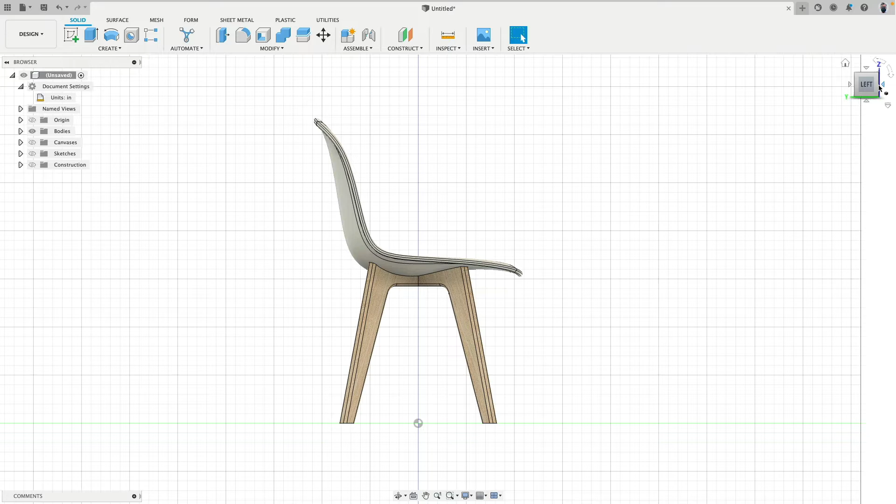Hello everybody, and welcome to this not too long tutorial in which I show you how we can sculpt the T-spline body for this plastic shell, then use some interesting sketching techniques to create a perfect sketch to position these wooden legs right under the shell, and then use solid modeling tools to trim everything so we have a perfect match. We'll also start by bringing in some sketches from dimensions.com, and with all that said, let's do it.

We can start this exercise by going to dimensions.com and taking a screenshot from the side, front and back of this Eames chair. While we will not necessarily rebuild this chair, it's actually a really nice design to use as a proportional guide, like for the backrest, the legs, the base, etc. So based on your operating system, Mac or Windows, use the correct tool to make side, front and back screenshots. Let's go to Fusion.

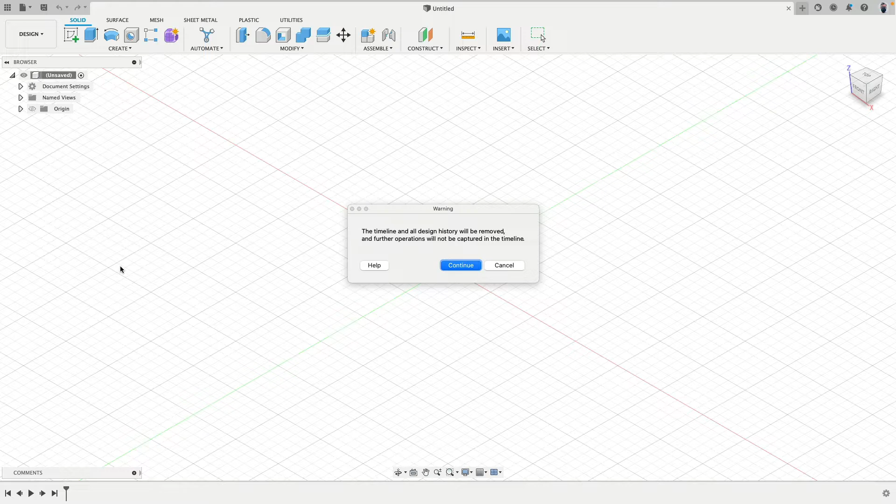First thing, we go to the root, right click, and turn off the design history. Then we go to document settings and set this to inches. Cool.

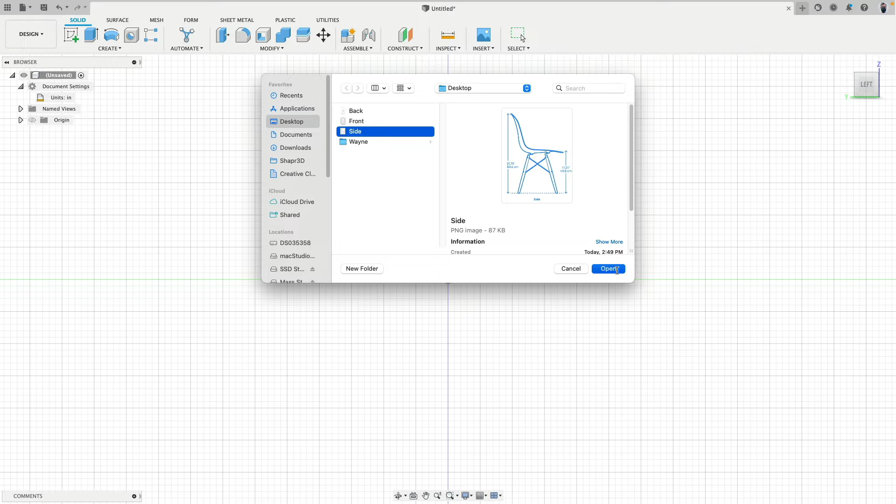We can now go to the left view, and then insert, insert from the computer, and here is my side image. I start with this one first because this one does actually have a scale. You can see this.

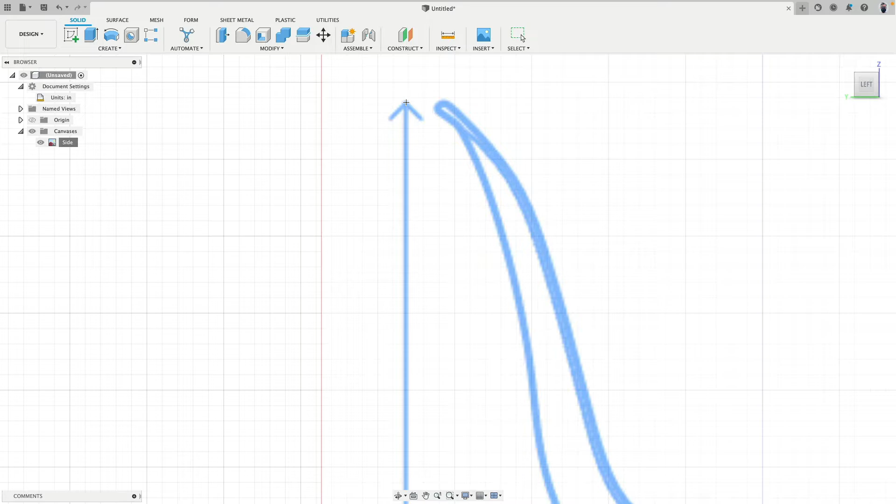After we clicked OK, right click onto the image icon for the side canvas, calibrate, and then I can select this and click there, and this should be 31.75 inches. I can zoom out a little bit, right click, move and copy. I will move this to here so that the top of the tip is on the blue axis, and then move this one up. Now I have this point right over the zero point along the z-axis. This makes the next step quite easy.

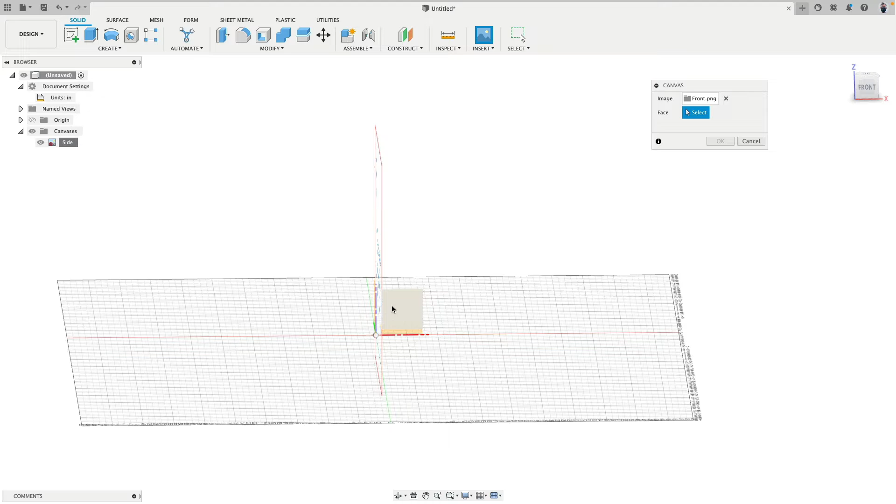I can go insert, then select the front image, and there we are, this will be on this plane. I can scale this up a little bit, flip this, move this up. Now we see this is way too small, so we can adjust the scale a little bit.

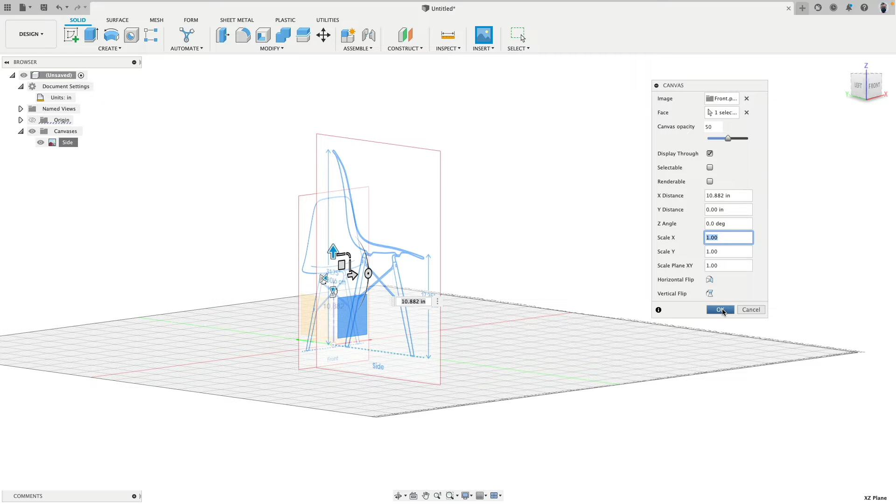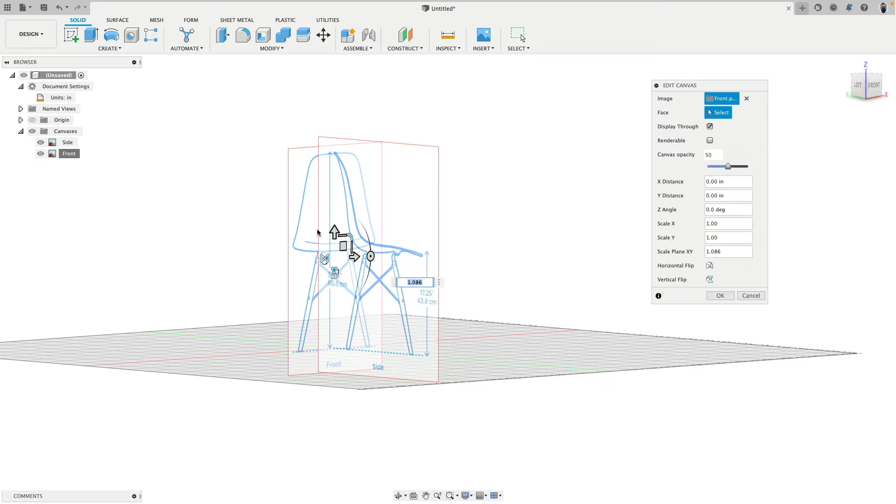I find it easier now to select the front image, right click, edit canvas. With this, I can visually move this up and down and scale at the same time. That nearly is it, maybe a little bit like this, okay, now a tick higher. So this is now on the x-axis and it nearly touches it. Yeah, this is actually pretty good.

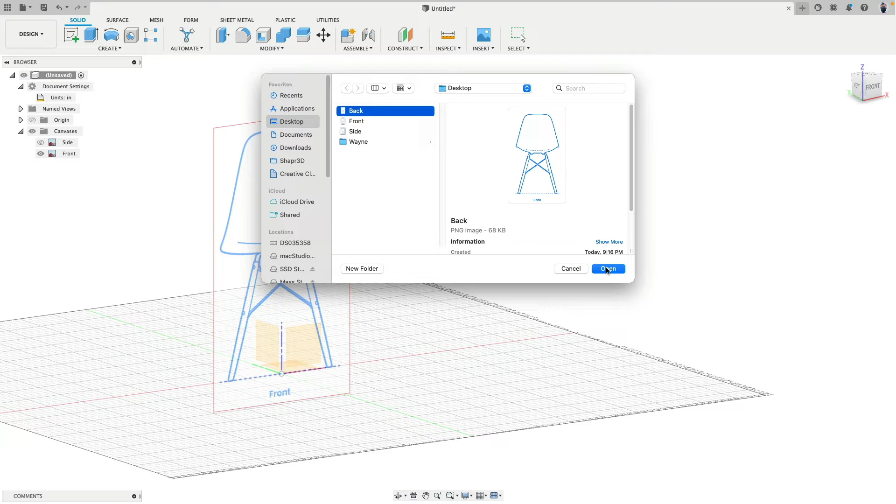I will now add the back image. There we are on this plane, and I can scale this one up. Now in this mode, I bring this one up and just try to match this as close as possible. Yeah, this looks pretty good.

Also, let's make sure this is symmetrical, so this is centered. This was the back. Right click, edit canvas. There, this is centered. Very good.

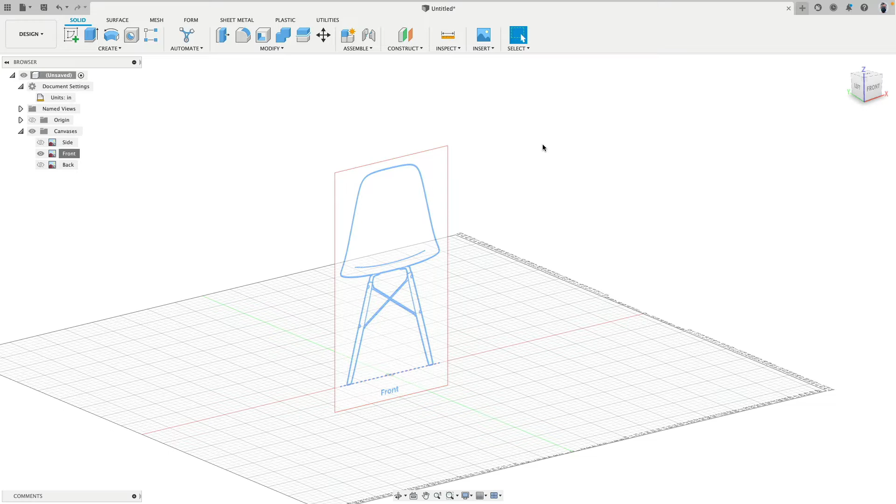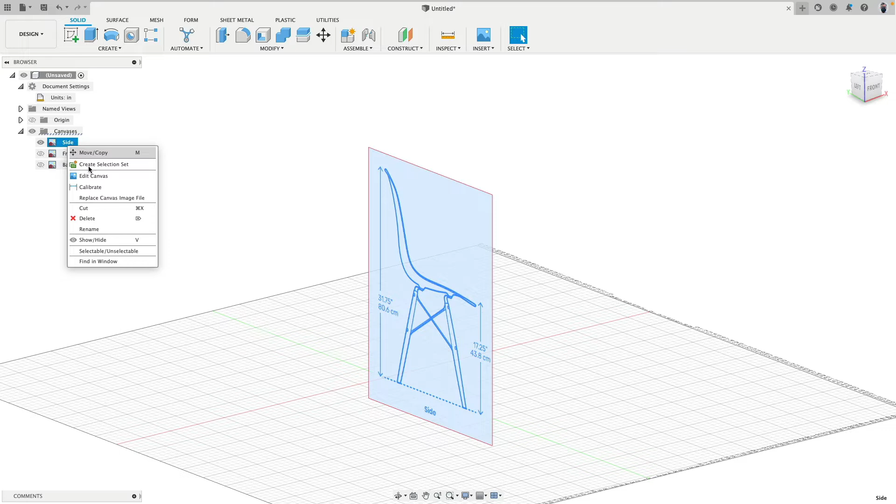In front view, I see the front image, so I'll move this one a little bit back. Then in back view, I will see the back image, so I'll move this one a little bit forward because I'll be looking from there. Then the side image, right click. What happened? There, right click, there it is. I move this a little bit further away because I'm always looking from these three views. Very good, so now we have our two most important elements set up, front view and side view.

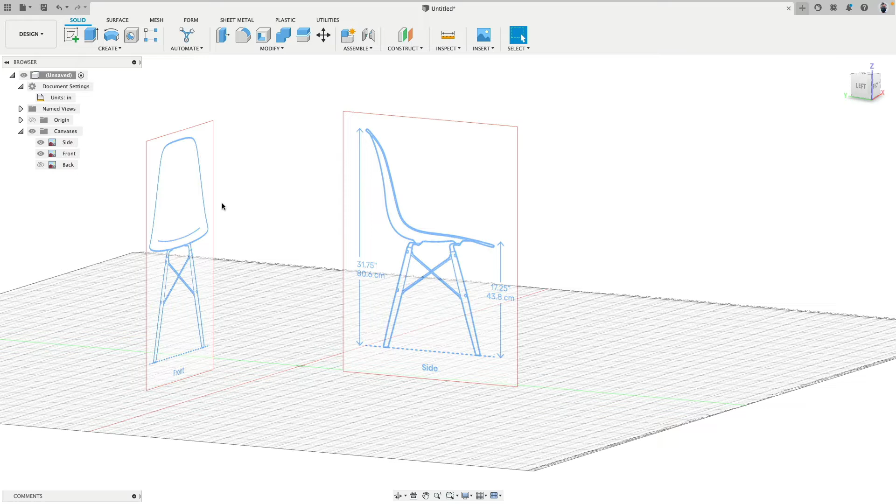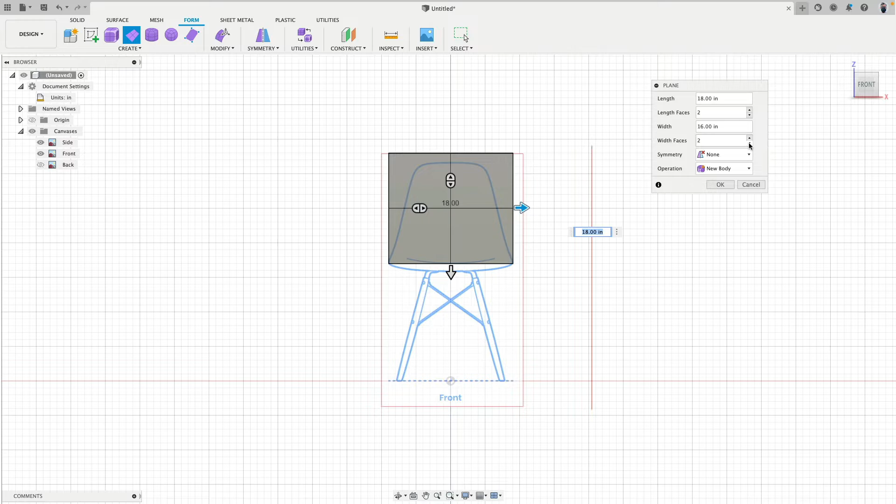To start now, we can go to front view, switch to form, and then go to plane. Click on this front plane, click somewhere here, and then I create a rectangle that is as wide as the image is. I set this to 1 and 1. Beautiful. Edit, modify, or here edit form, and then I select edge.

I can select this edge, go to the right view, move this one to there. Then I select the next edge, there, and move this one maybe to here. Now I need to have one point there. Now here comes the trick: hold the Alt and Option key, and then drag one more edge out to there, one more possibly to here, one more to there, one time more.

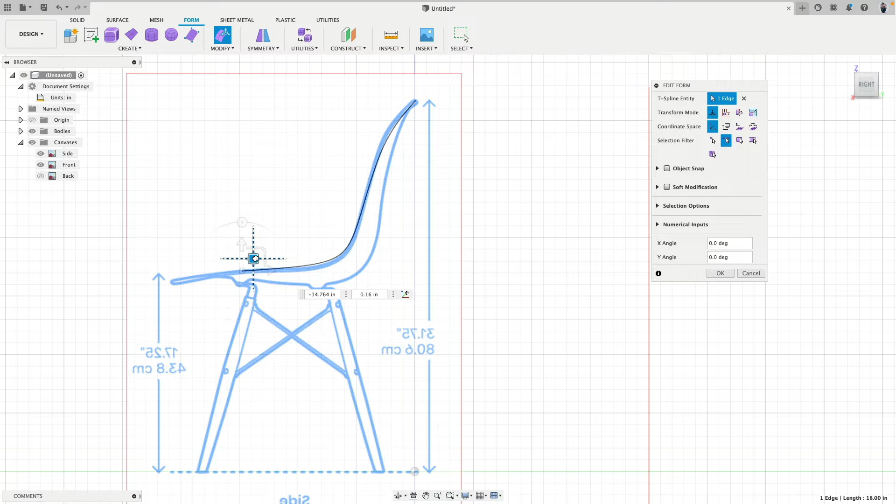I'm still holding the Alt and Option key and click and drag to there. So every time I hold the Alt and Option key, I click, drag and move, basically extruding out the piece. Okay, now it doesn't look too bad. Then we can go to vertex mode, drag over the individual points, and adjust how everything looks. And this feels pretty good. Okay.

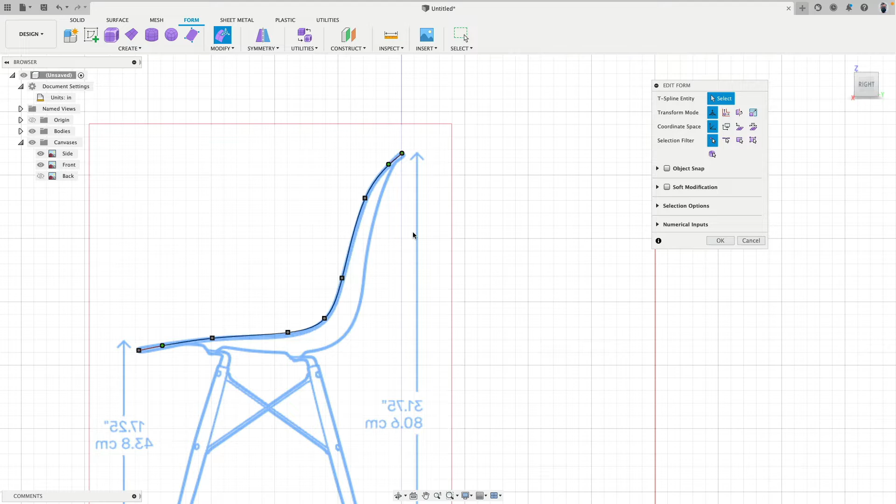Not bad. So now we need to do this center dip down. Go to the front view, click OK. We'll go to modify, insert edge, double click. That double click selects basically the whole edge loop, 50%, 0.5, OK. Double click and now I delete this one.

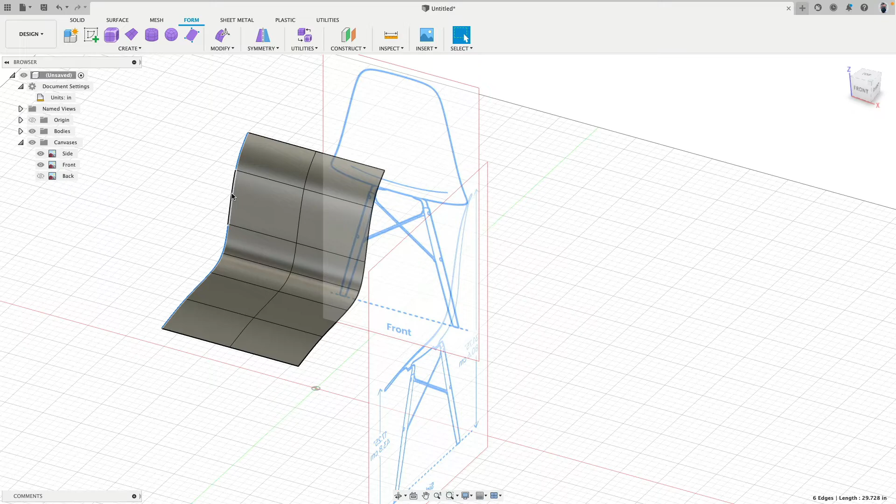So we removed the half. And I'm going to rebuild this back via symmetry, mirror, duplicate. So this one, mirror along this yellow plane, because that's the mirroring plane. Cool, okay.

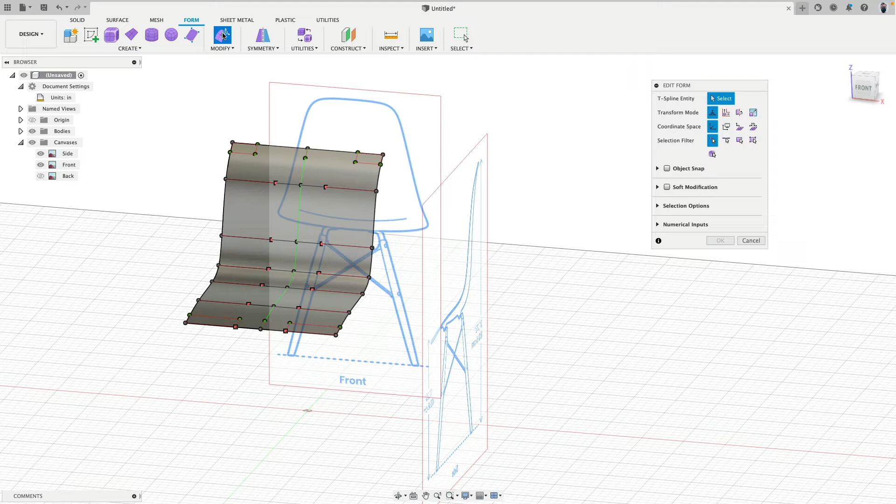Now I can go ahead and maybe select this edge, go to the side view. No, just pull this one out. Go to here, pull this one down. Go to the point, pull this one down. And play a little bit.

In a moment, we also have to adjust the handles. There we are, so this is kind of like cool. Click and drag over everything and then click on the chain, so the handles are all now aligned with the surface. That's pretty good, okay, that's nice.

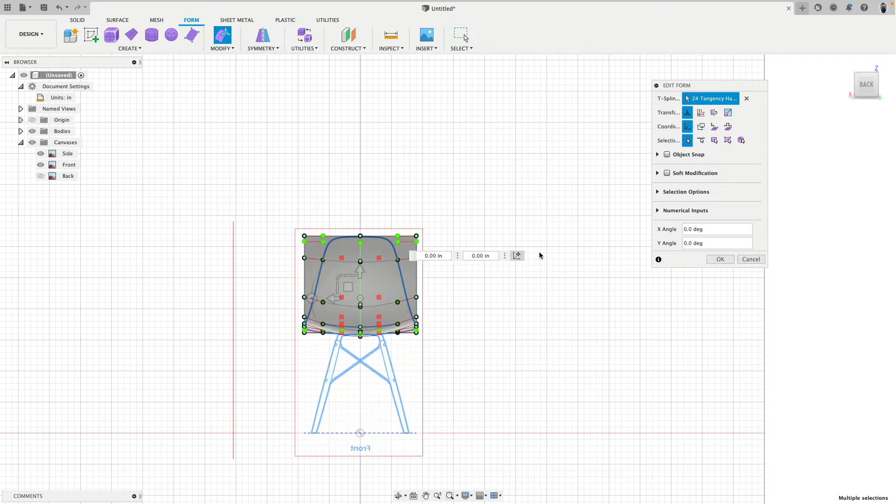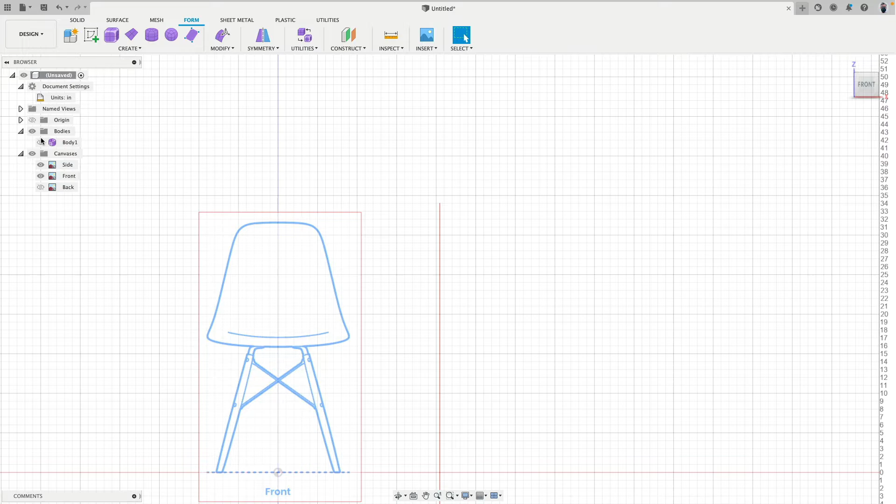So what else can we do? Now if we turn this one off, we can see how there's a little bit of an arc. And if I turn this one off and show the back, you can see from behind this dips down even more. Okay, so right now here, this is very linear. So this edge needs to dip down a little bit.

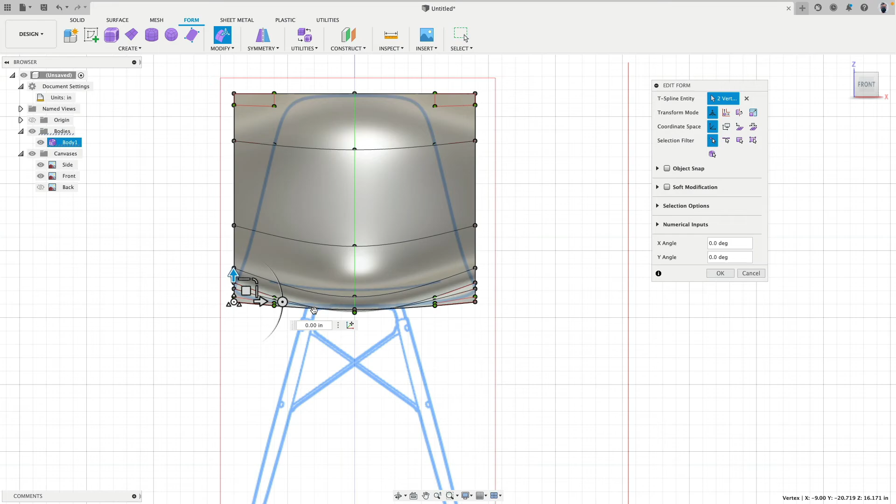Maybe like this. Yeah, maybe. Cool, okay, and the other points, for example here, they can go up a little bit. But before I do this, I will switch to edge select. Select this edge, this edge, this edge, and yeah, this is good.

And now I click on this set pivot point. Now you can see how I reset this position to there. Click and say OK, and I will rotate all these edges together at once. There you see this actually really helped moving this all in. All lines are moved smoothly together.

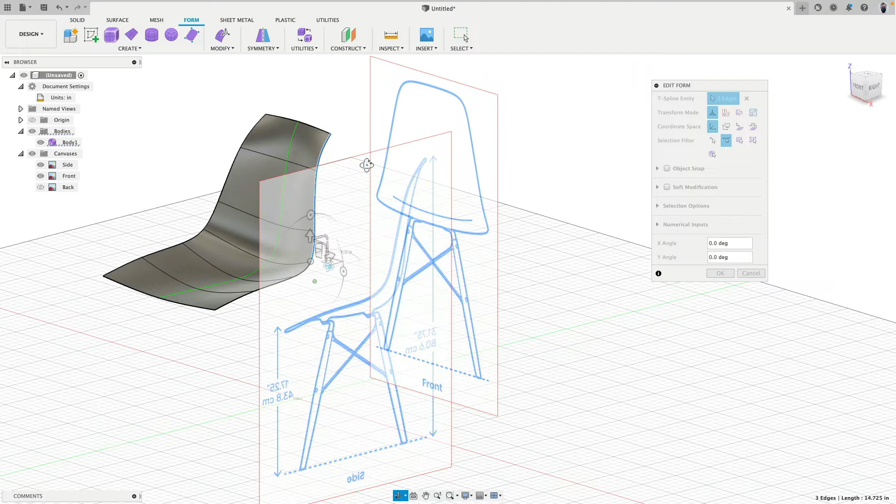And maybe this whole thing I move in a little bit too. Cool, okay, now so we quite nicely gave this a taper look. This corner, and the other corners in the front, are rounded. So we go uncrease edge. Click, click.

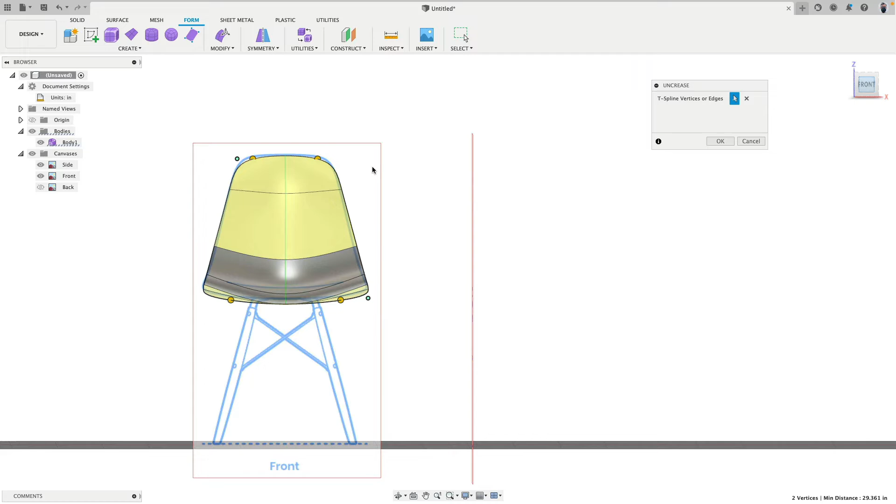And there we are. It's actually nearly a perfect match. Not too bad, yeah, no? I think so too, cool. Okay, so what else can we do? From the side, yeah, this is actually maybe a little bit too aggressive.

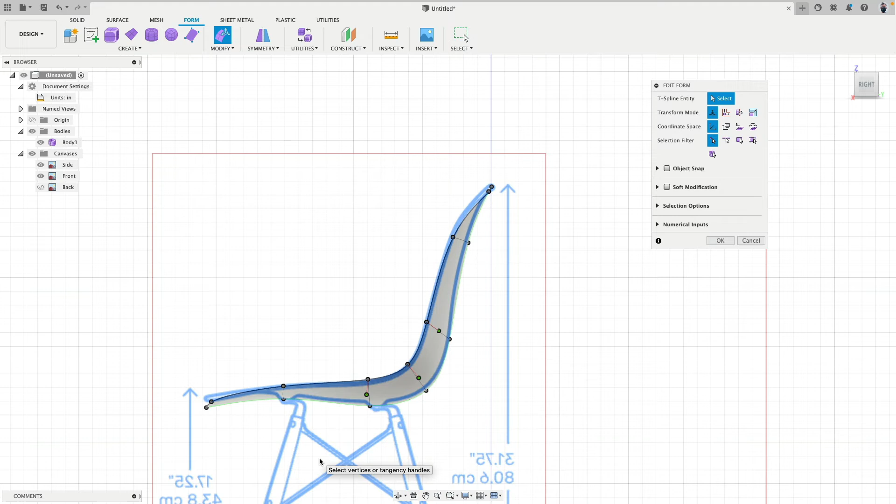So now here, this edge we can lift up. Then here, this point has to lift up a little bit. Maybe here, this goes up a little bit. You have to be careful how things look from the side and from the front. These drawings are not necessarily always perfect either.

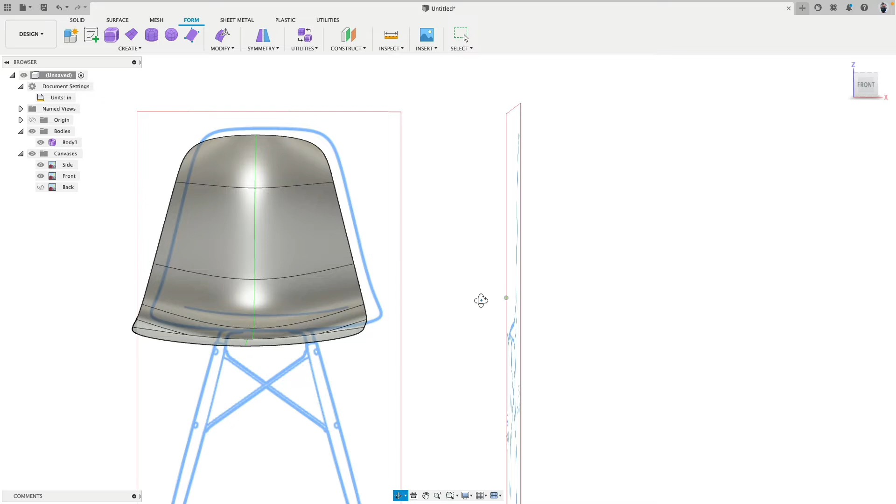Cool, okay, so we have to trust our eye too. This is all nice, we would like to stabilize the whole design. So check this out, I will select this, and then I go to U, and U, and U. So all these side edges here, not the back and the front, hold the Alt Option key and extrude just a tiny piece out. And that, in theory, should straighten the side, and then we have kind of like this dip down piece.

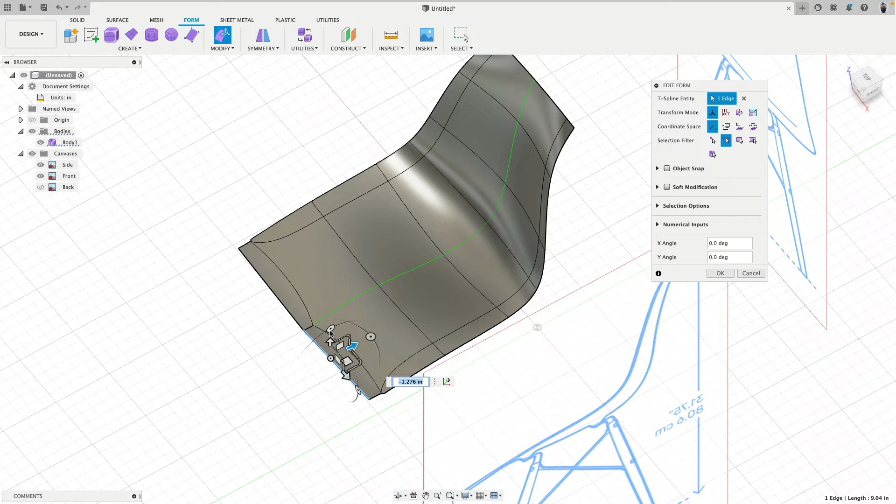Beautiful. Now we can do the same with the front, but only this edge I drag out. And there's something going on here right now, I will show you in a moment how to fix this. And then we do the same also here, hold the Alt Option key, we extrude this one out. Cool, okay, so now we have this stuff happening.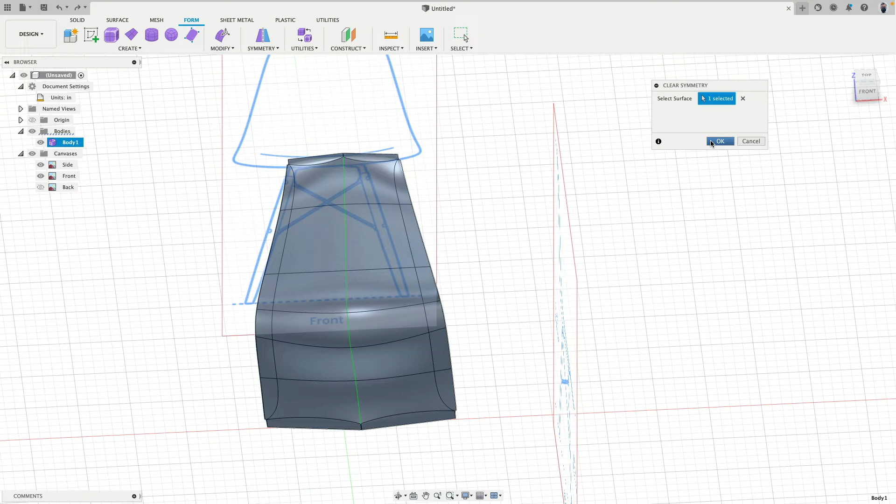So if we delete this, then everything is gone. So what we will do is we will actually clear the symmetry. Clearing means we apply it, and then I click and then right to left drag over there, and then I delete this half. Okay, and simply reapply the symmetry.

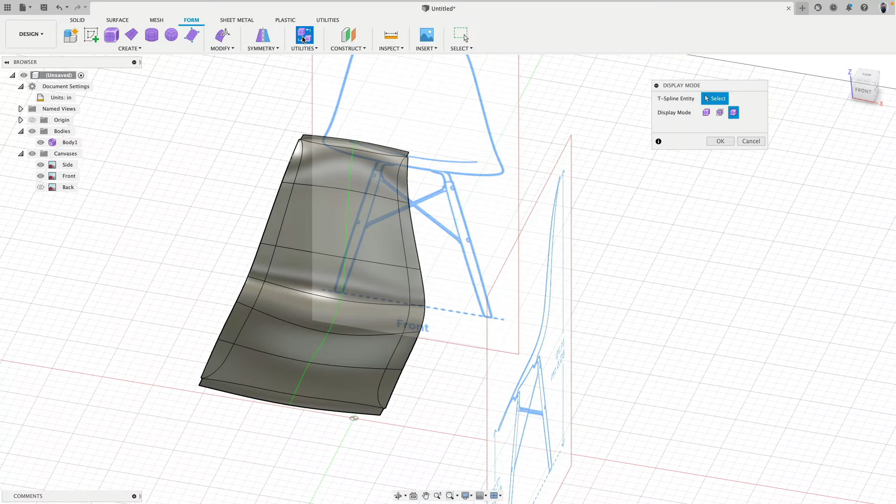There, problem fixed. Let's go to utilities and switch to box mode, and we can see a little bit of an issue we have. So this point should be merged to there. Merge, do we have a merge command? And yes, we do, merge edges, merge point.

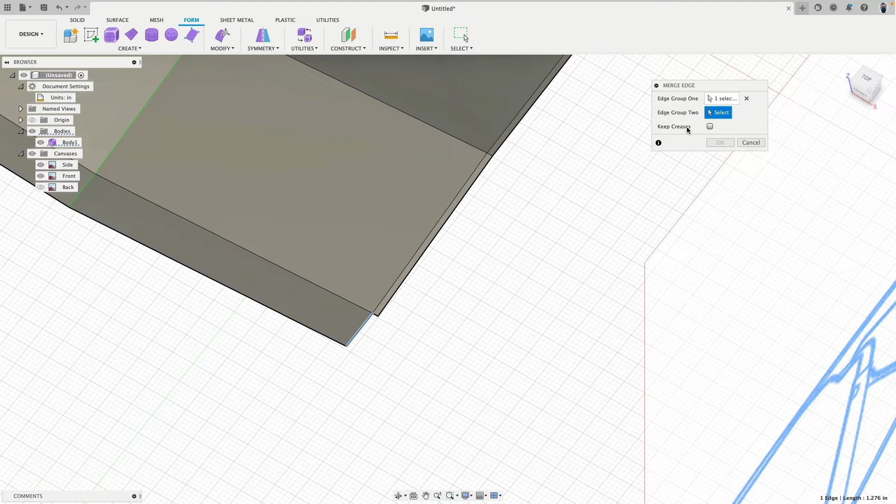Let's see, this edge and this edge. Have to maybe zoom in more. Okay, there you see, it got merged. Perfect. Now we can go to point select this point and move this one out. So we kind of like have a miter corner, if we want to call it this way.

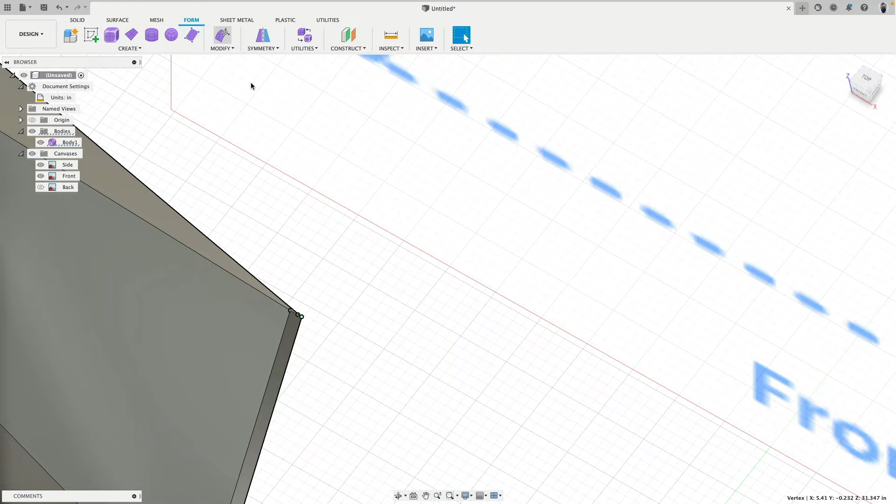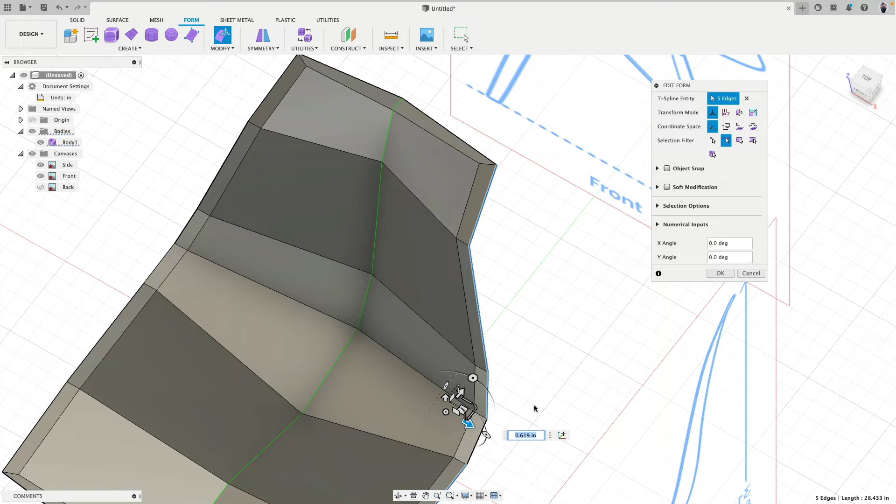So they're really short, so double click. No, this is a loop. So shift and then left mouse button click, I just select these individual edges here and drag these out a little bit till this starts looking good. And maybe here, this point goes back to there, and this maybe a tick forward.

Cool. Let's see how this will look. Nice and smooth, yeah, it's getting somewhere.

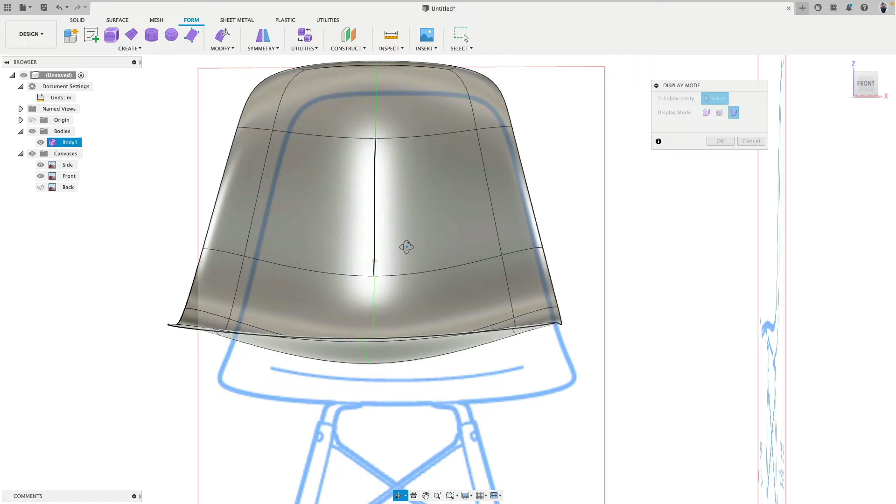We can see in the back actually how we get this nice lip. Here in the front, we could bend this down more if we want. Let's see what this will do when we just select this edge and pull this down.

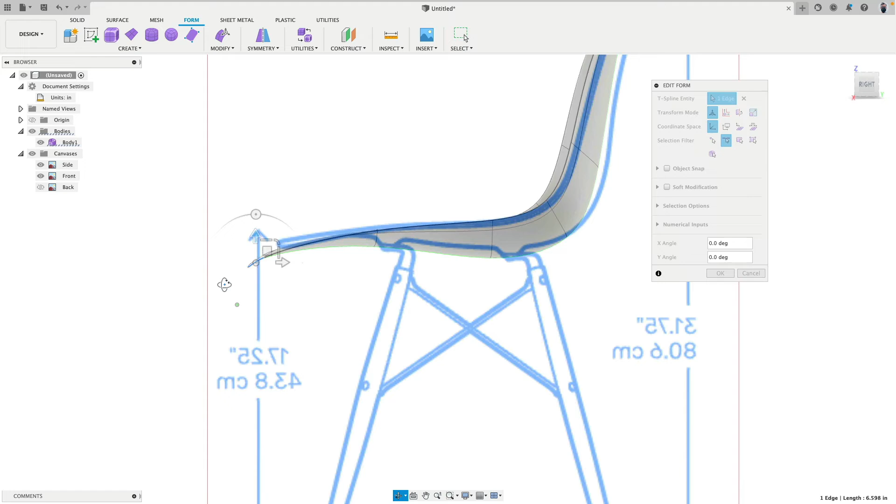And here, there, we just leave this horizontal. We can see now on these two edges, that's where our hip would be. And then this is more kind of like a horizontal stabilization. Pretty nice, pretty nice.

And insert edge. I'm just trying to see, out of curiosity, what happens when we add another tiny edge there. And then you see this actually will crease this a little bit even more, no?

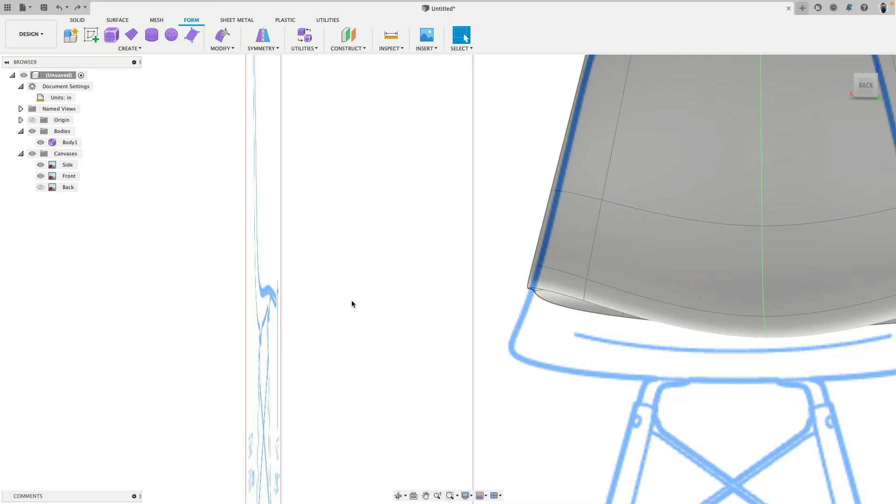Just for those who are interested in this, if you want more detail, we can add more creases to it. And if we pull this one down, let's see, looking from behind. Yeah, so it pulls this down a little bit too. This is something we can do. Doesn't actually look too bad.

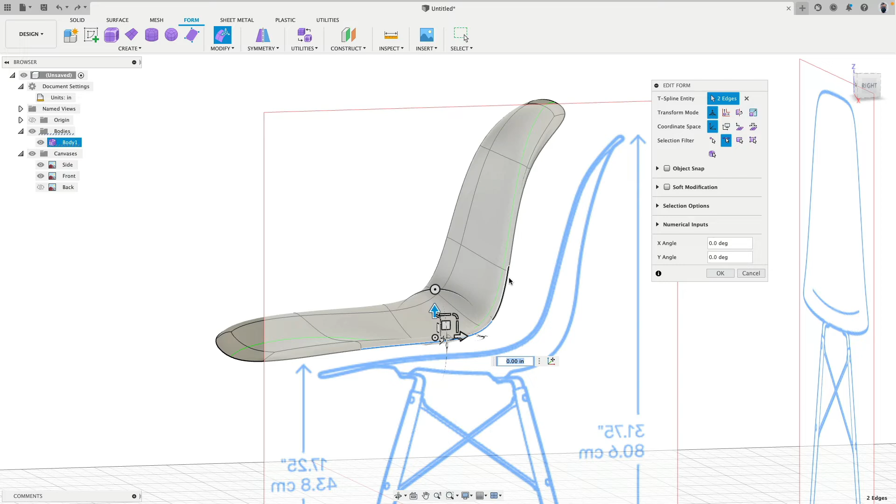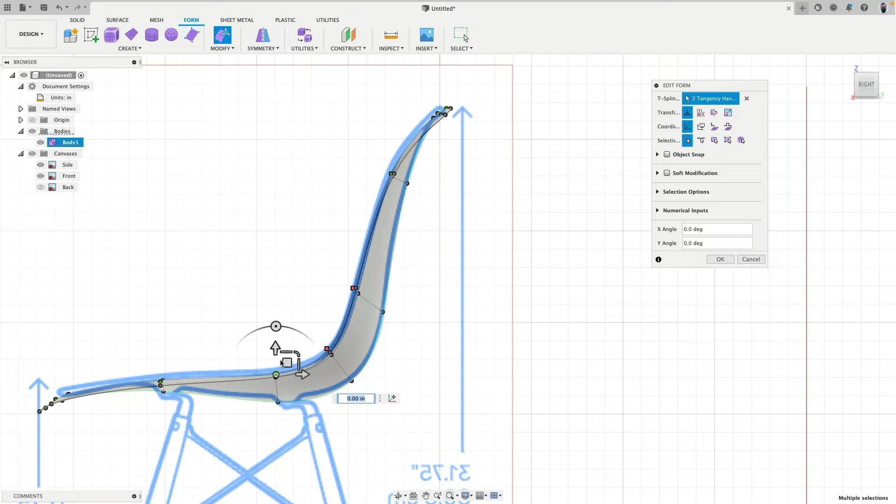So let's do this also on the sides. That's a nice thing about the T-spline design tool. It requires a little bit of practice and a little bit of manual work. But then you can sculpt quite intricate and interesting shapes.

There, I move all this up. And this maybe a little bit back. A little bit over. A little bit there. Yeah, there we are. Pretty cool.

Okay, so I would say the canvas here for the moment, that is good. And then we can go to surface, and sorry, solid. No, wait, let's get back to form.

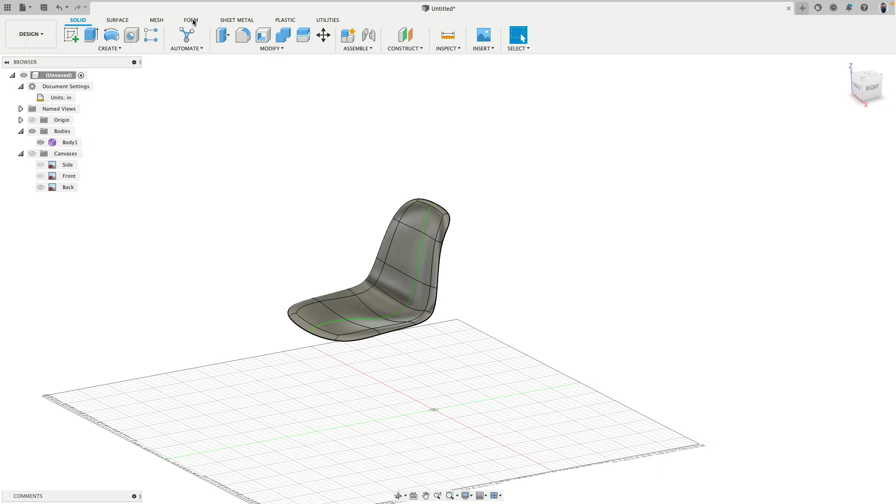This we want to convert. See, when I'm in form command and I right click, I see convert. If I'm in solid and right click, oh, we have this convert too. Wow, okay, so scratch the 2 seconds before. So we need to do this convert when we right click on it, but I think we have it down here, convert form.

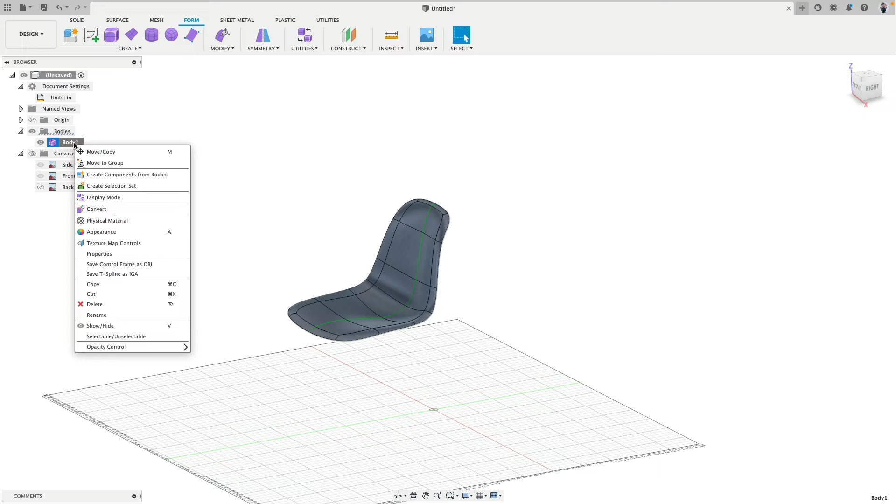And then where do we have it here? Under utilities now. So you see this command sometimes switches position. Anyway, convert T-splines to B-rep.

Thank you. And then solid and thicken. And we give this a thickness. Maybe this we can make a little bit bigger, 0.5 of an inch.

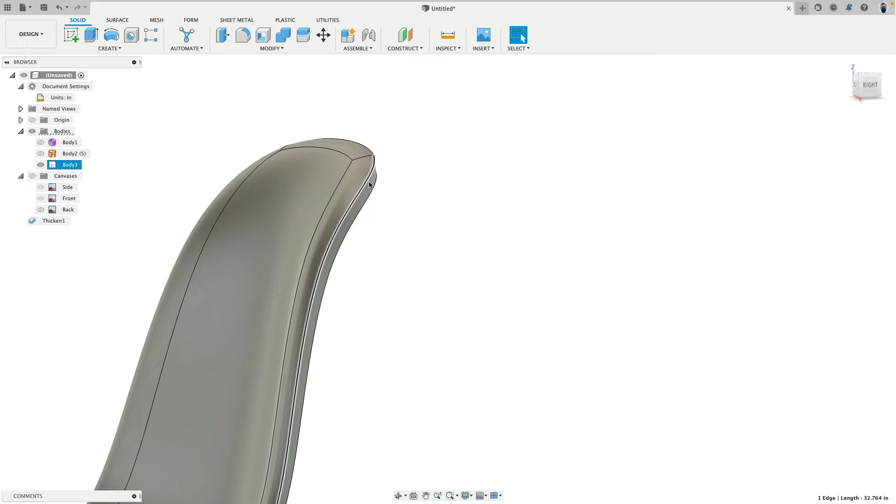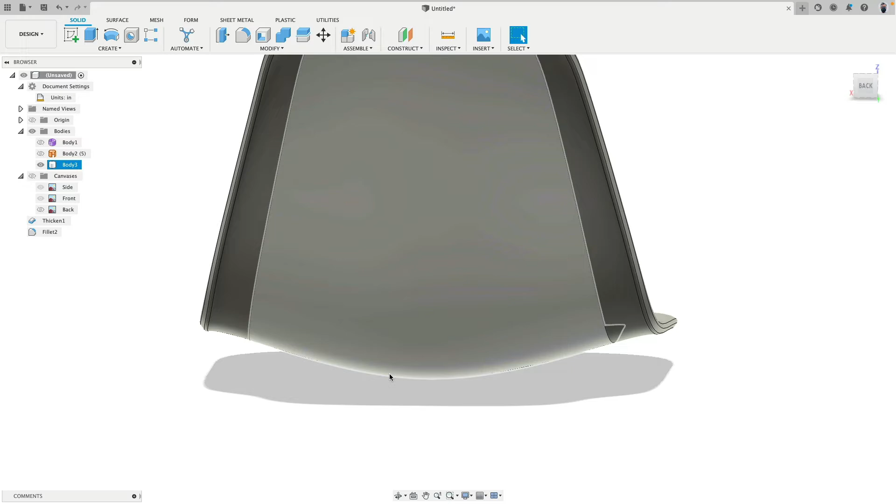Very nice. Then we can select two edges and give those a nice 0.125 fillet. Cool, okay, it's actually pretty nice. Now here we can really see how this is round, and then this starts to look more horizontal. Pretty cool.

So we will do a little bit of an adjustment actually. Hold on, I will select you. So they're all turned on. The front and back I really don't need.

And now I will go and say move copy, bodies, drag over everything. This one I would like to reposition. Maybe let's see. Let's click cancel one more time.

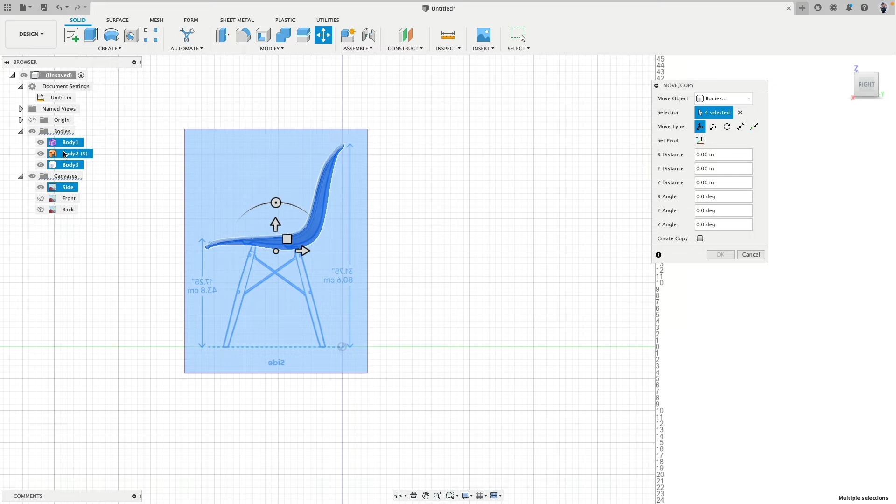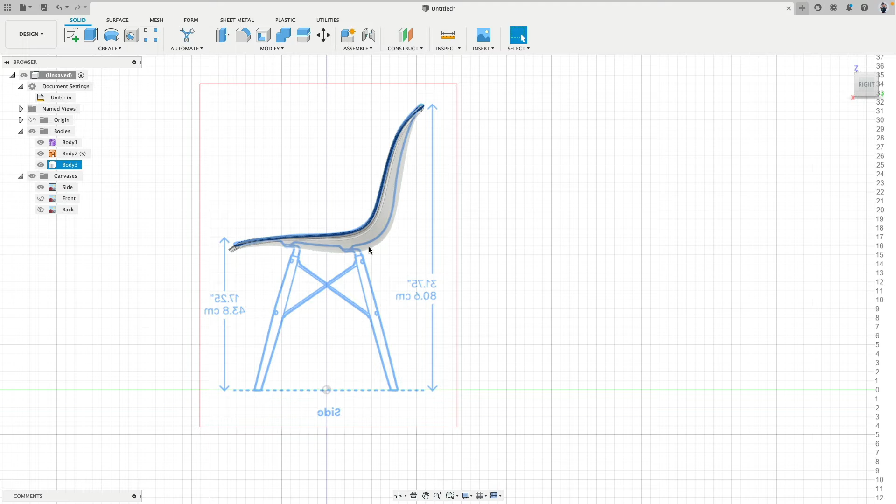The main reason for that is now, look, this is centered, and we go into front view. And this is centered now, so I can draw basically a rectangle and then use these feet as the helper where everything has to be.

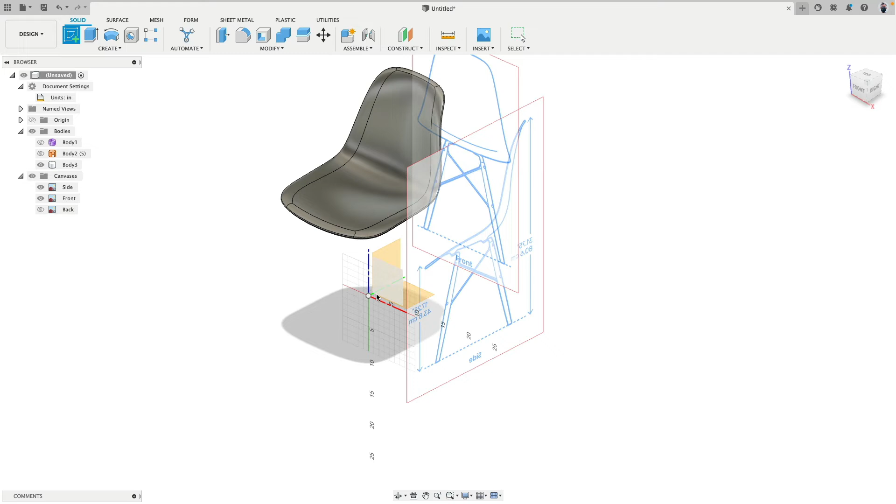So top view, we will create a sketch on this plane. And then now this is actually 16 by 16. So center rectangle on the center point there, and then 16, tab, 16, enter. And finish, that's all we need.

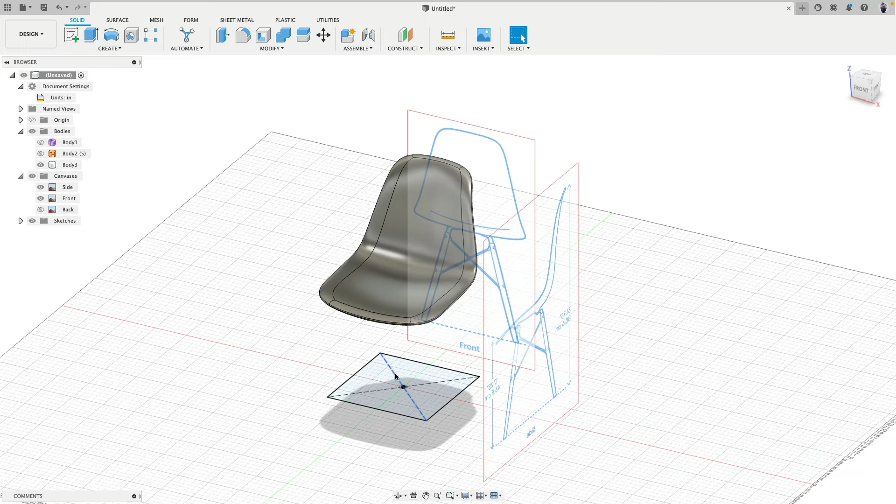Because with this, we have 2 diagonal lines. That was the main trick behind it. So I would like along this line to have another sketch.

So I need another construction plane. Construction plane, plane at an angle. I can select this line. And then here's a construction plane I can rotate. Should be 90 degrees, cool.

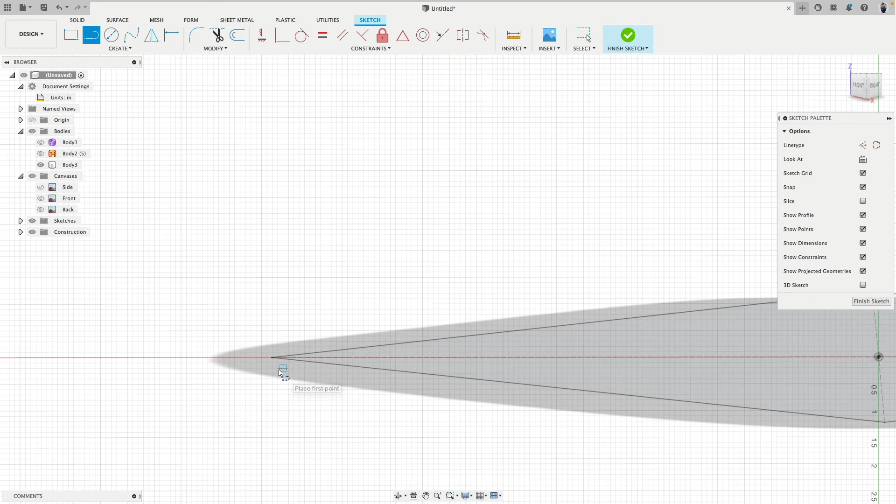Yeah, and then on this plane, there, I'm going to create a new sketch. Cool, so keep in mind, these points is where the legs are. So actually, this we don't even need anymore. So plus minus here on the grid, that is where this thing would be.

I have here the leg, we go over, we go down, we go backwards, we go to the ground, and we close it. So this first sketch I'm going to hide because it's kind of like in my way. This is now where the leg should be.

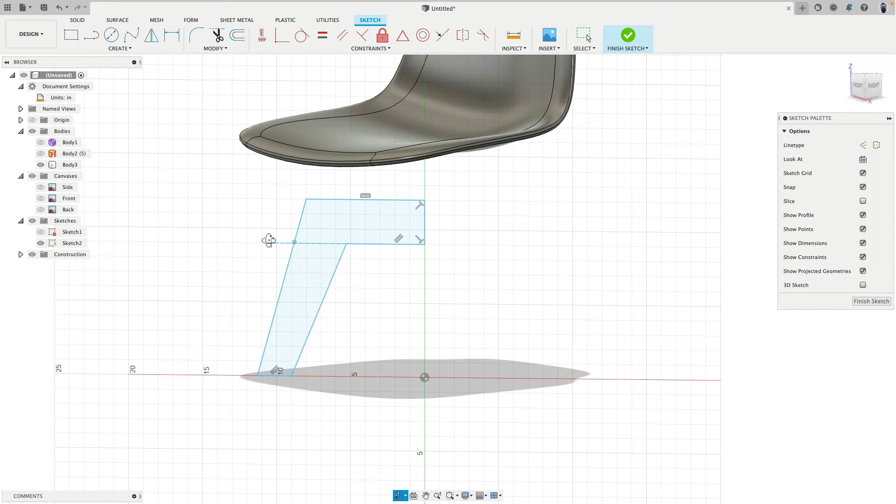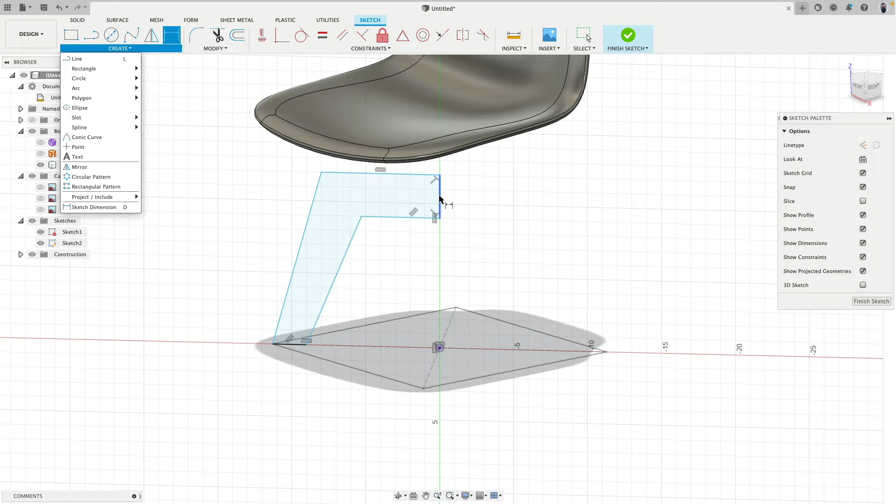Press escape, and this I want to be centered. So horizontal, vertical constraint, this point to here. This point should be horizontally on the ground. Cool, press D for dimension, sketch dimension. This we can make 2 inches.

And this one we can make 1.5 inches. Okay, yeah. Maybe, that's so 3. Okay, good.

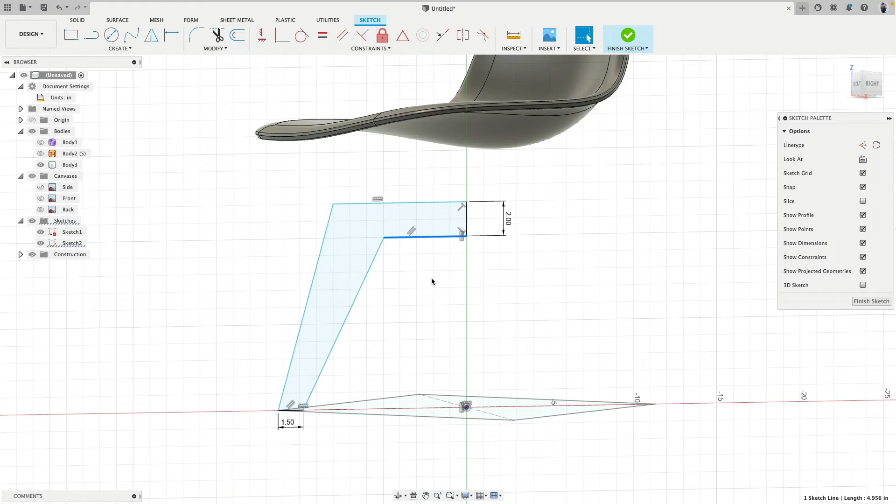What we can do now is, this whole thing can be moved up. So there is actually now the lower part. Now we can ask ourselves, how do you want this design? Are we going to have spacers, or is this going to be a wooden shell or shape where we later cut out the space for the shell to sit in? That's what we're going to try.

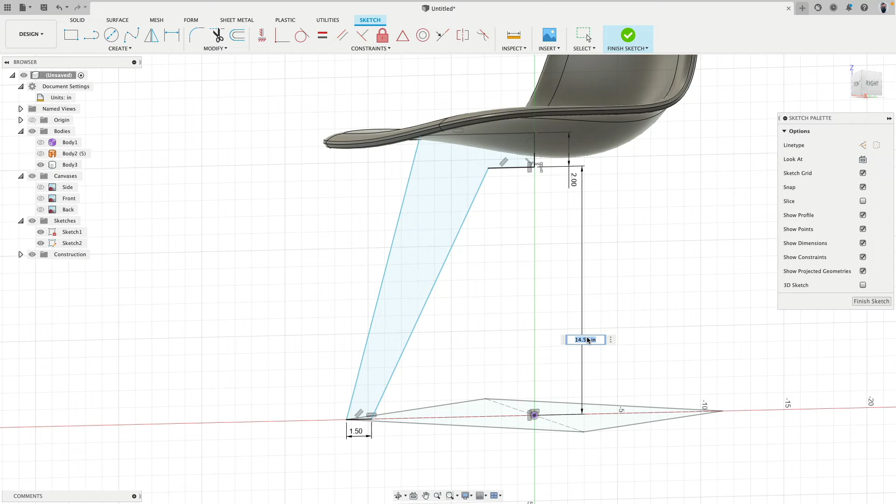That's the easiest one. So this I simply move up till I see at one point it starts to fit in. So D at this point to the ground. What about 14.5? That's pretty close. My case, 14.25. And nearly, it's okay. We can keep it where it is right now.

So, when this is 1.5 inches, maybe I would like to have a line here, horizontal. Click, escape, select this line, construction line, and then D. We can make this 2 inches.

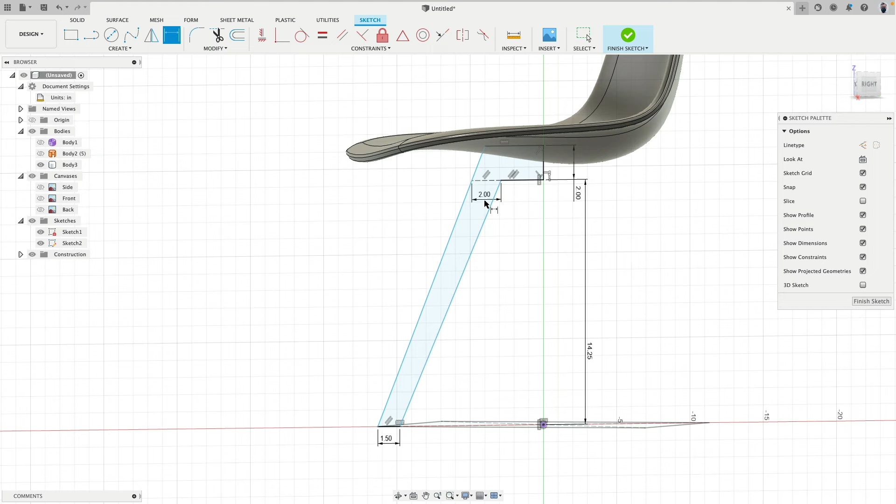Okay, maybe 3 inches. Good. Escape, and can we move this maybe a little bit further? Yeah, so now we can specify what's the angle. From here to here, so outer point, center point, D.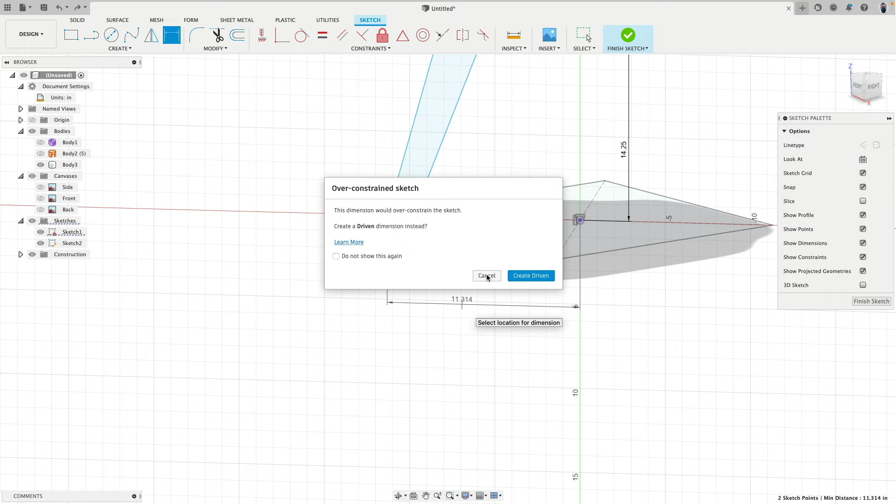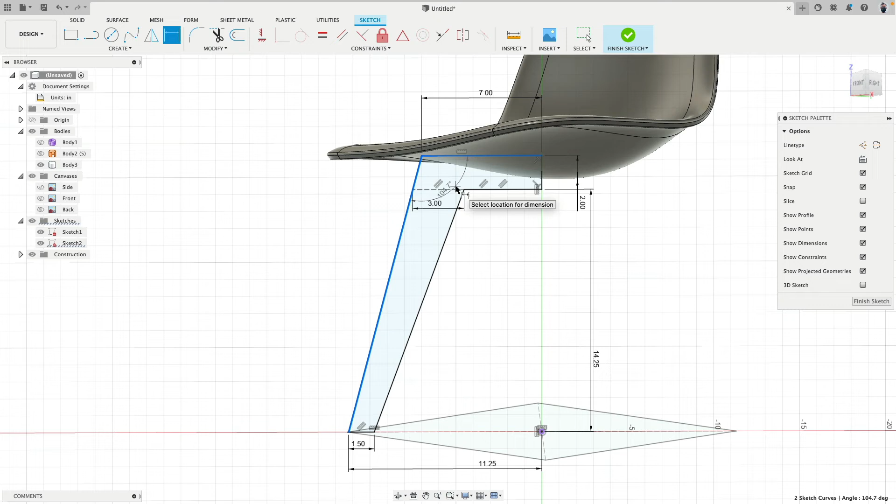Very good. And up here we could also say, let's make this clean, 7 inches. And we also have, for example, a readout. So this is 110 on the inside. And this is 104.7. I can also delete these numbers and then only work with angles. It's up to you to decide. Anyway, that's kind of good. That's all I need. I do not need anything else.

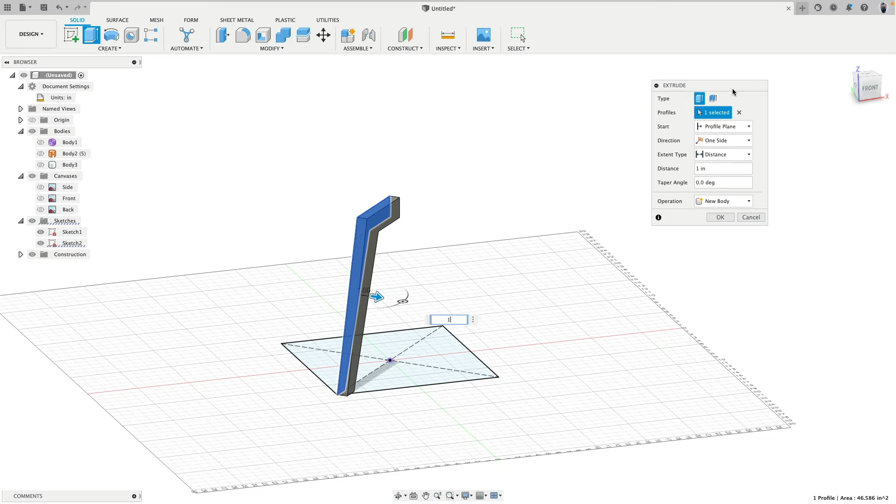So the shell I'm going to remove. I go to Extrude. I select this, 1 inch, symmetry, 1 inch, maximum left and right together. This feels good. Okay.

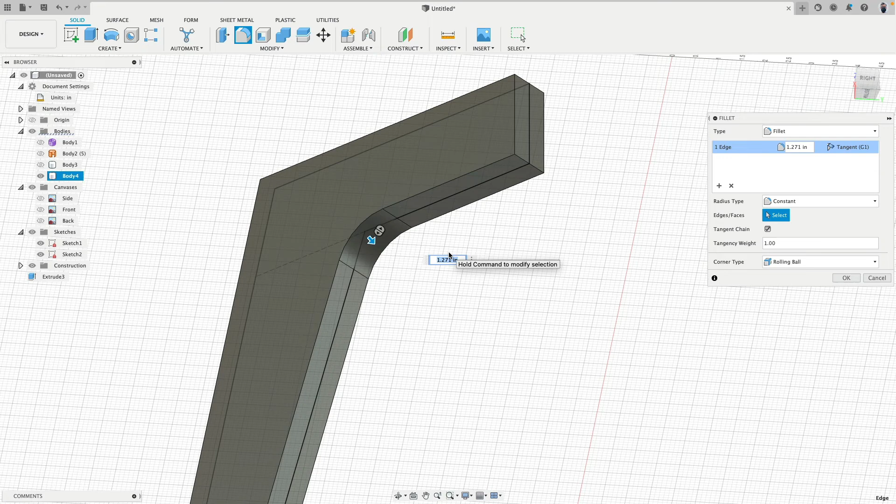Now, yep, whatever. We want to create a little bit of nice details. So 1.25 for the inner rounding. Yeah, why did I do an inner rounding? Check this out. So when I round these two outer edges by 0.25, you see now this is rounded.

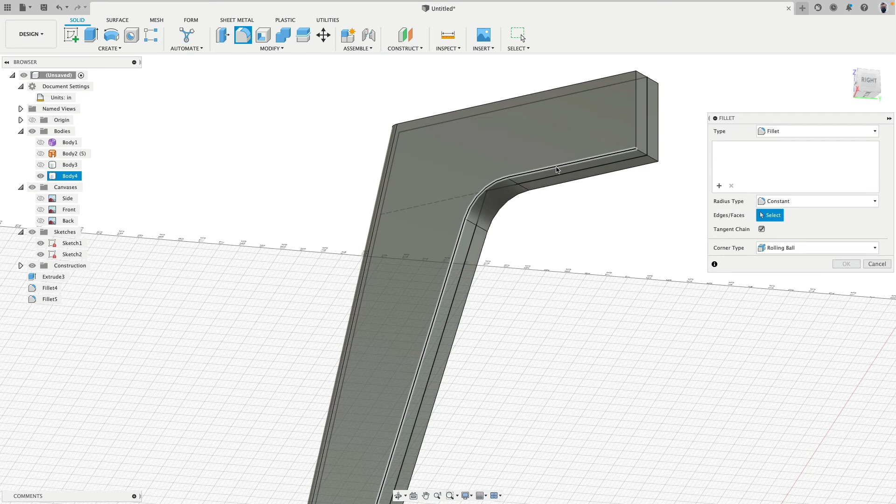And if I now go ahead and round this edge and this edge, oh, look at this, it selects everything. These were before, you can see individual edges, but when such a corner is rounded, like what happened here, it's a tangent connection. So it rounds it down for me this way. Pretty cool. Okay, nice. That's actually quite good.

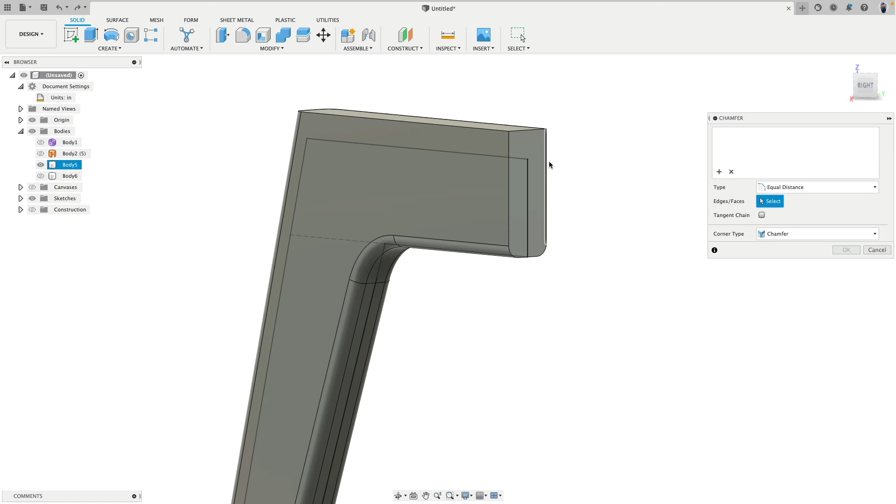In the next step, we can think about how this is going to be joined. Maybe we'll do a simple chamfer. The tangent chain here is always turned on by default, so we will get an error message. What we have to do is turn this off, click on nothing selected, and then we only select these two with shift, vertical edges, and 0.5. This creates a nice chamfer.

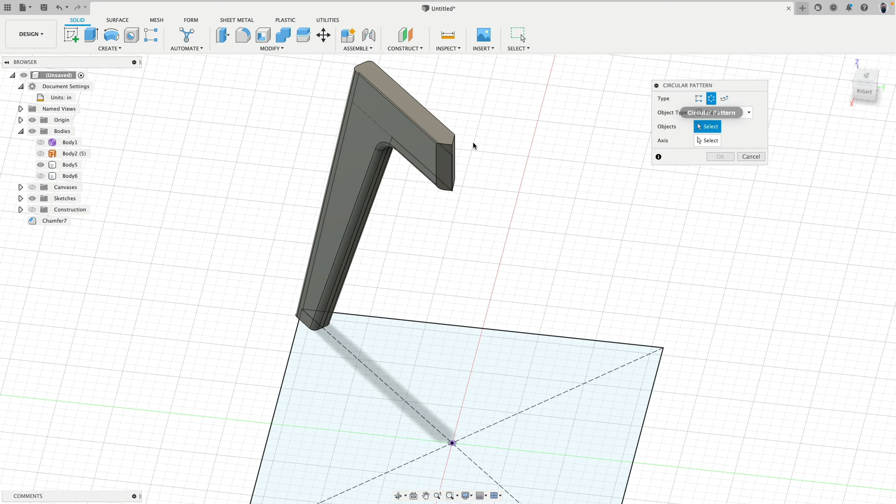Okay, very nice. So, next step. We need 3 more of those. We go to create circular pattern, bodies, this body, along kind of like this inner edge we have here. Or we can also go to origin, click on the Z axis, and 4 pieces. And look at that, all line up perfectly.

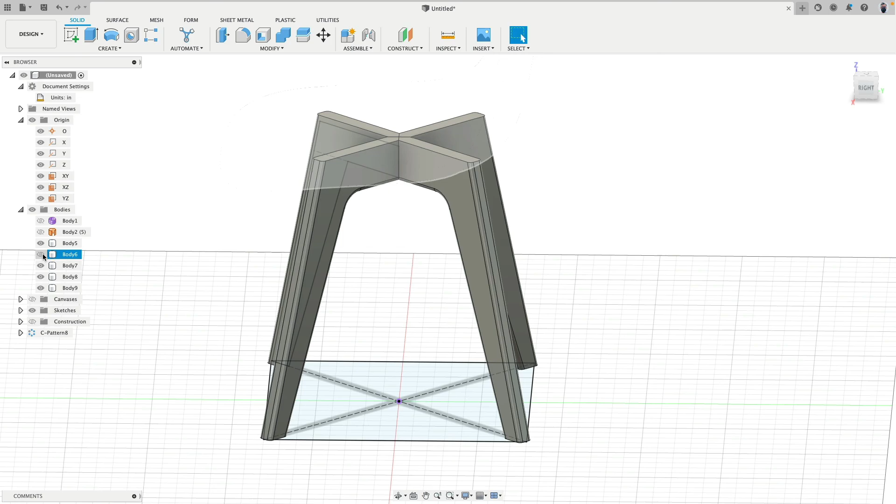Cool, nice. Now, can show the shell. Yeah, this is all sticking out way too much, but that's fine because now what we can do is combine, and say from this one, remove this one, right click, repeat. From this one, remove this one, right click, repeat. And from this one, remove this one.

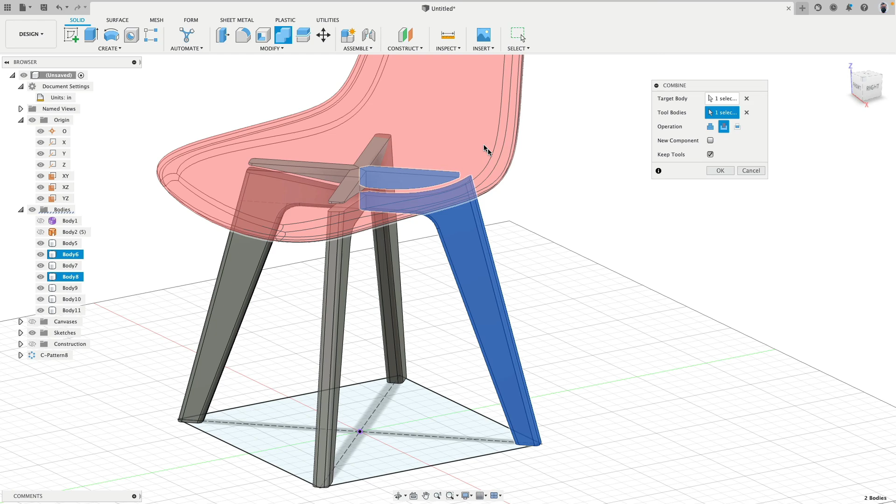Keep in mind, I always have the keep tools option turned on. And whoops, that was the wrong order. Hope, come on. And there, cool. Okay, so this body, delete, this body, delete, delete, and delete. Yeah, look at this, it nicely actually flows through it.

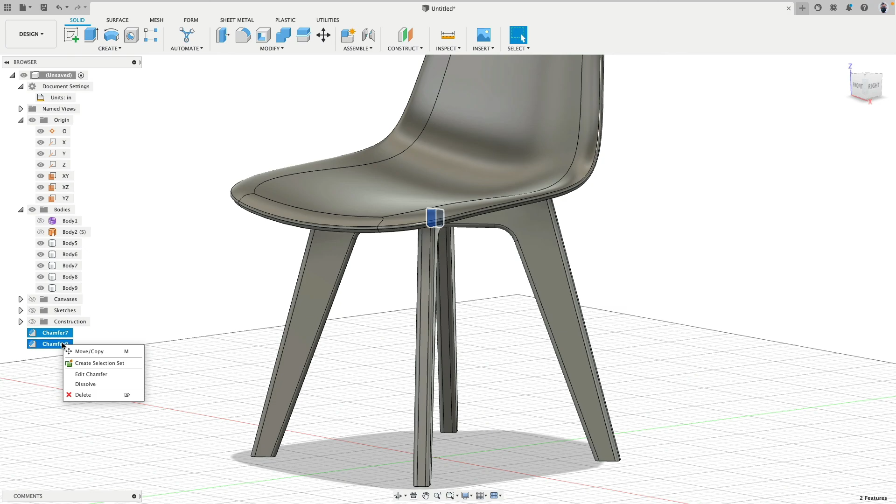We will do one more thing. We can now hide sketches. All this we can dissolve, right click. Yeah, this is good. Close everything. And then we can go to modify appearance and we can go to plastic.

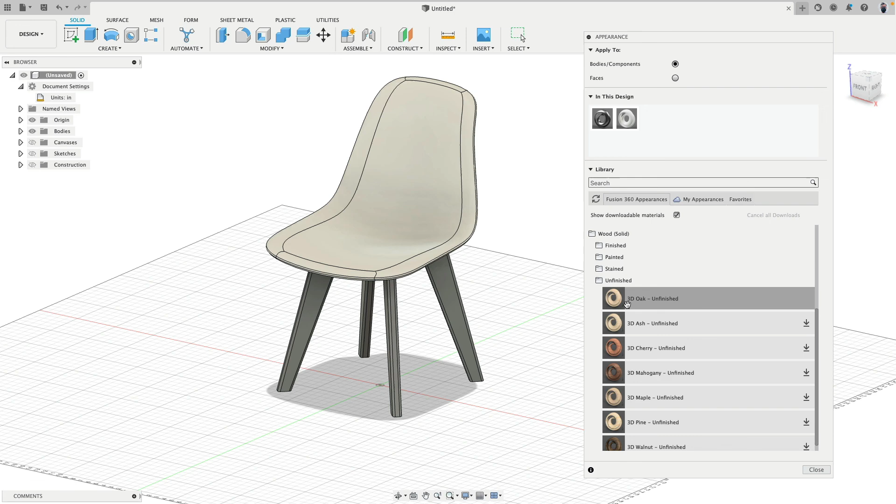I will move this down a little bit. Can give this a white one. And then, you saw I had this already open, we can go to solid wood, unfinished. And I have here 3D oak unfinished. I clicked on this download button and then we can drag this onto these legs.

There. Our software is smart enough here to understand how to adjust the grain. Yeah, this looks already, for a quick concept, quite believable. So, now there we are.

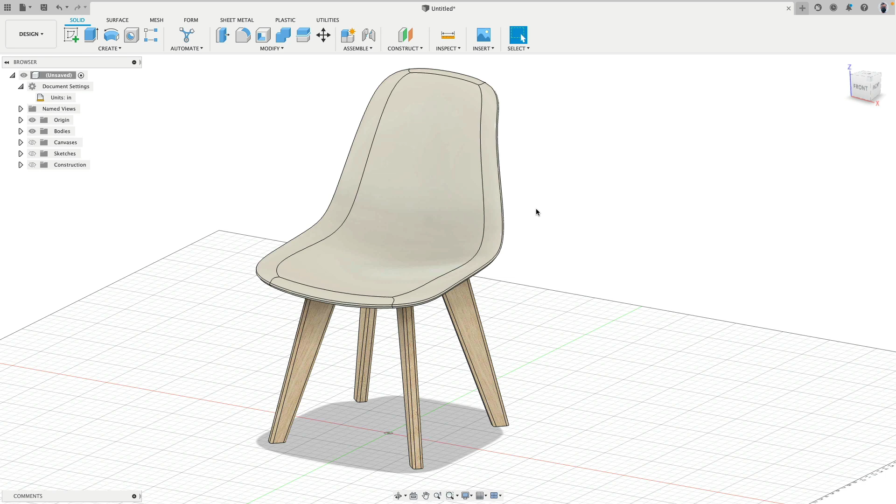There we have actually this base created. We sculpted the shape a little bit more, and then via some basic geometry tricks found a diagonal line, and then on the diagonal line put the sketch for the legs, modeled and trimmed it. So easy peasy, as you can see.